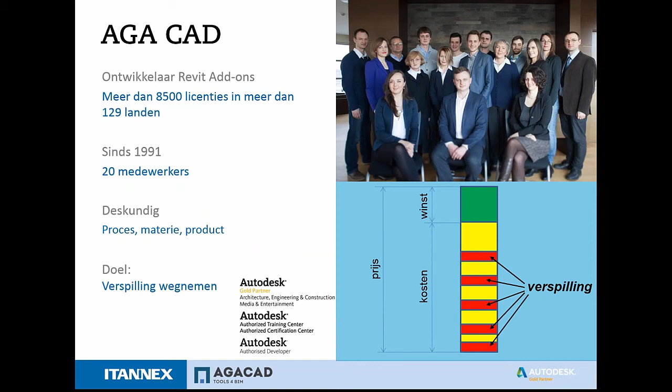It is nice to see you here. I want to say something about our company, as we are AGACAD and we are creating the solutions for Autodesk Revit. So here is the bucket of our solutions that can fit all of your needs.

So we have the solutions for MEP engineers for fire protection design, ventilation design, heating design, hangers. As well, we have the cut opening that we will show to you today, that goes for making openings around MEP line based elements. As well, we have the tools for Revit add-ons, just a little add-ons that can increase your work productivity for creating legends, exporting Excel to Revit, making cut openings, the free version, and so on.

We will speak about that a little bit later. As well, we have the smart assemblies, metal framing and wood framing for structural engineers for rafter, trusses, walls, floors, and so on. As well, we have the smart browser that goes for browsing of the libraries and managing them. So it's a very powerful tool for BIM managers, library managers, and so on.

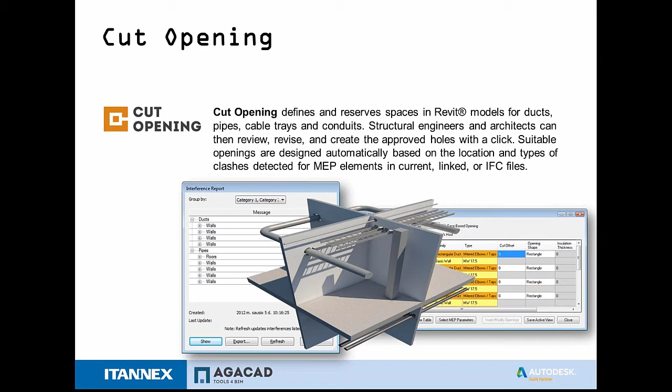Today I will also speak about the cut opening free, which is kind of the same thing but has less functionality. The cut opening free easily cuts holes in places where MEP ducts, pipes, cable trays, and conduits intersect walls, floors, ceilings, or roofs. This add-on manages the creation of openings using Revit interference check results.

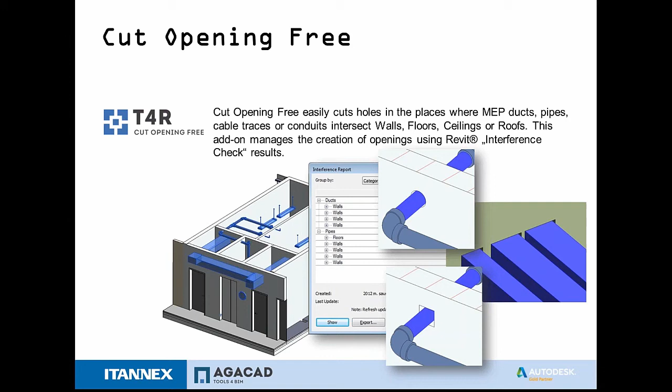So I just want to go quickly to my Revit, and here I have a little sample project. Here you can find the ducts, here you can find pipes, here you can find cable trays and conduits.

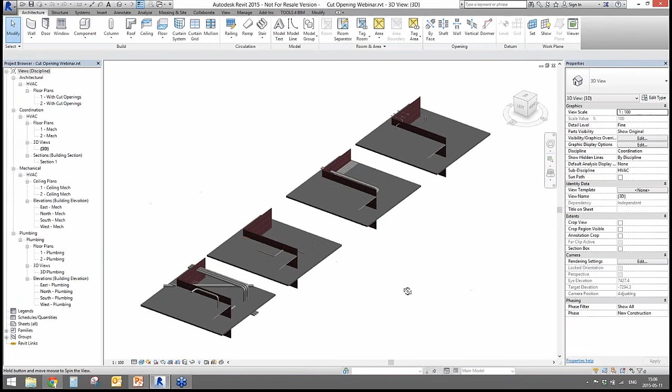Our solution is working in TOOLS 4 BIM dock, and you can find the cut opening over here, as well as the cut opening free over here. So you can drag and drop your own tools and use them quickly from here.

In the very beginning, the tool is using interference check information from Revit, and it is importing that information into the cut opening solution. So at the very beginning, I will run the interference check between different elements, between MEP elements and structural elements.

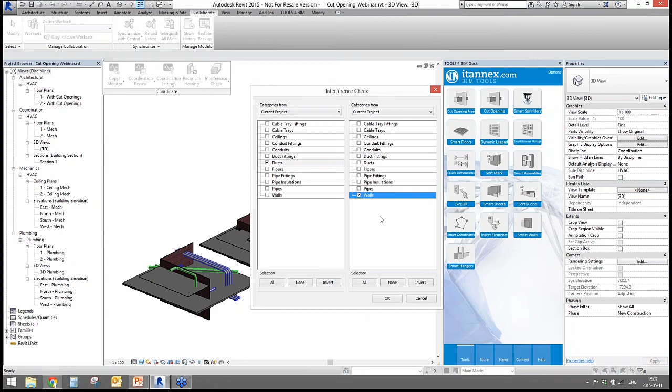For example, I will use the cut opening free at the beginning with ducts and walls, and I will run the interference check. So Revit finds all the clashes in our model just between ducts and walls.

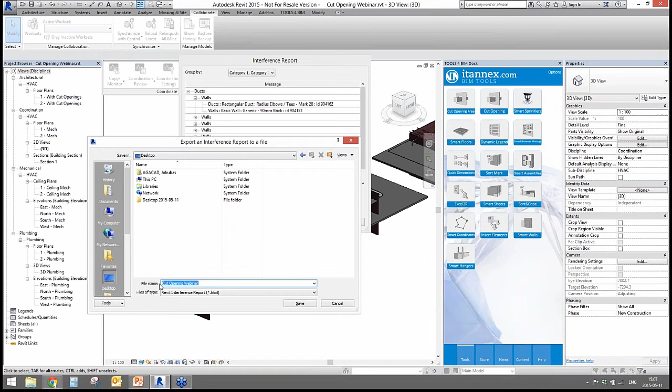What I can do is export all the information to external sources using the export functionality from Revit, for walls and ducts, cut opening free. So I'm just saving the file as an HTML file for further work with cut opening.

While clicking on my cut opening, here you will find all the possible features of cut opening. The cut opening free could read the interference check data and insert MEP openings straight into the same positions where the clash occurs, like where we find the wall and duct clash.

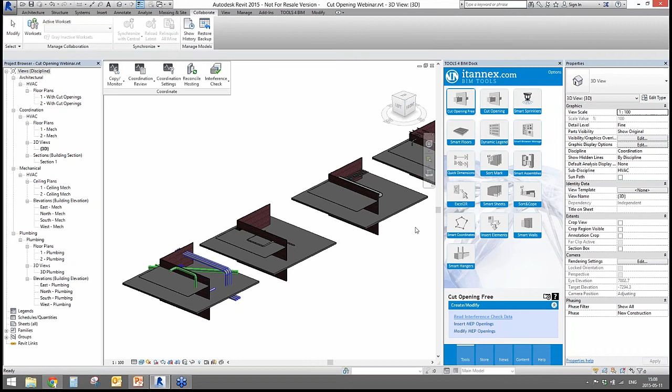At the very beginning, I will read the interference check data from the file that I saved on my desktop, the wall and duct cut opening free file, and it automatically finds all the clashes that we saved into the model.

As you can see, what do we have here? We have a really simple dialog box where we can do some configurations on the left side of the dialog box, for example if I need to sort my elements by levels and by types.

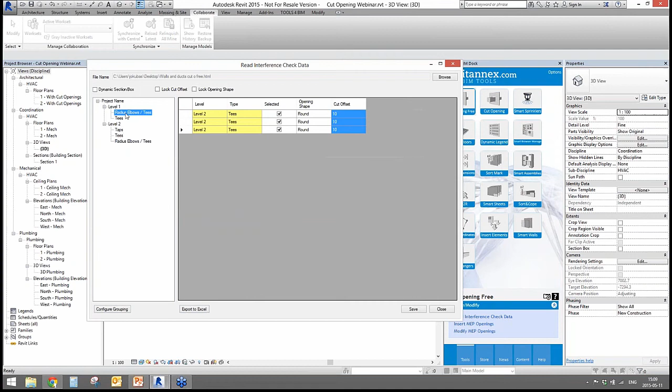I can also change the opening shape. For example, if I have the MEP line-based opening element round but I want it rectangular, it doesn't matter, it can handle that.

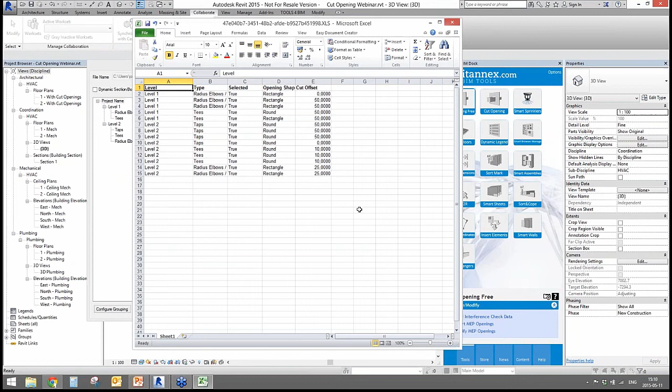So I can do these configurations for my holes, and after all this is done, I can export that to an external source like an Excel spreadsheet. You will see all the information about your openings in Excel. That's one of the possibilities of cut opening.

After all the configurations are done, we will save this file as an external XML file, just to read that information afterwards: the cut opening free XML file.

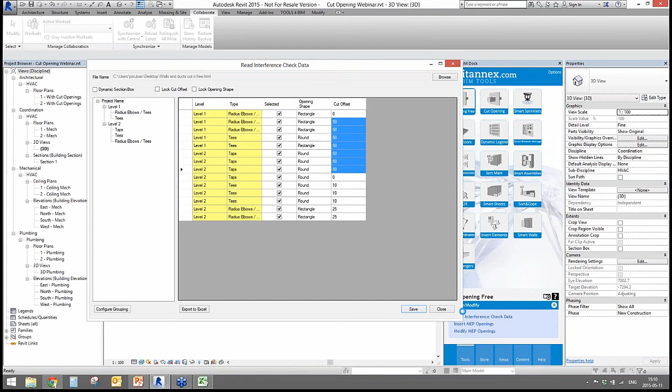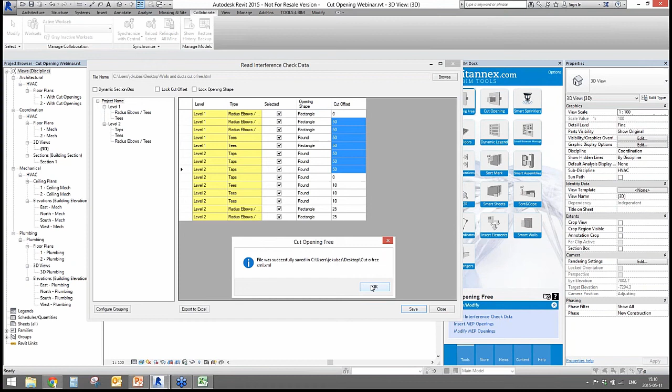So I'm saving that, and I will go to insert MEP openings. Now all the information about the offsets and the opening shapes is saved in our file. Anytime you can just send your XML file to your colleague, and your colleague can do the rest of the work.

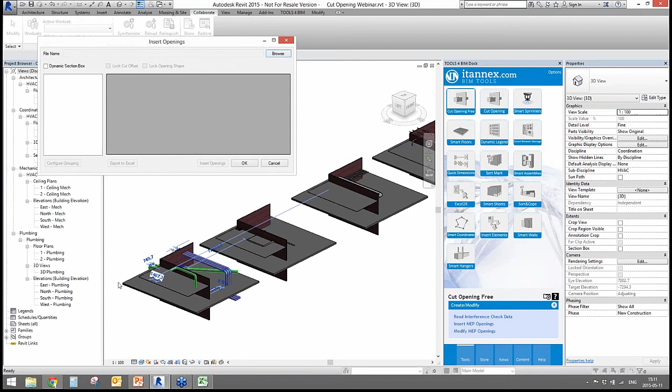It doesn't matter if you are an MEP engineer, architect, or structural engineer, you can do your work and send it to your colleague. So I'm browsing the cut opening free XML file, and as you can see, everything we discussed is still here: the cut offset, the opening shape. Anytime you need, you can take this XML file and send it to your colleague.

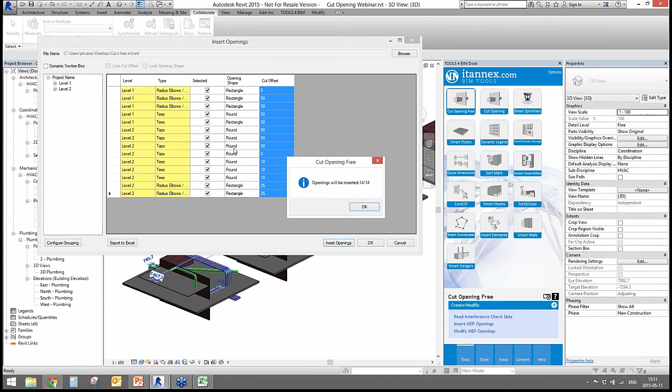This is a very nice possibility. After you see that all the things are correct, you insert the openings straight into the model. The cut opening free tool goes all around the building, looking for all the clashes between the walls and the ducts, and inserting separate elements in each place. After clicking OK, we get back to our model and you will see that we have created openings.

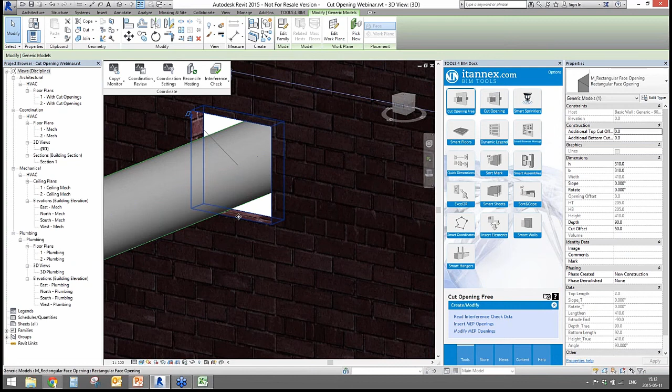Here we just created the rectangular opening where we have the round duct. Here we have the round ducts and the round openings.

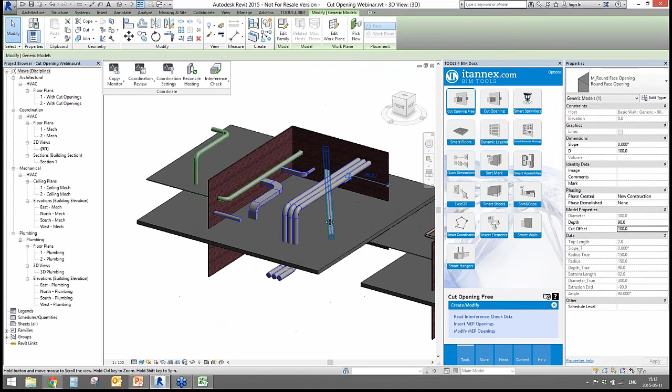Anytime you can do something manually, for example changing the cut offset of an element and so on. But cut opening free still has the possibility to modify MEP openings. If I click here, you will see all the element cut offsets and the opening shapes. If needed, I can change the value to 100 and say OK, and it will automatically recreate all the openings with the new parameters.

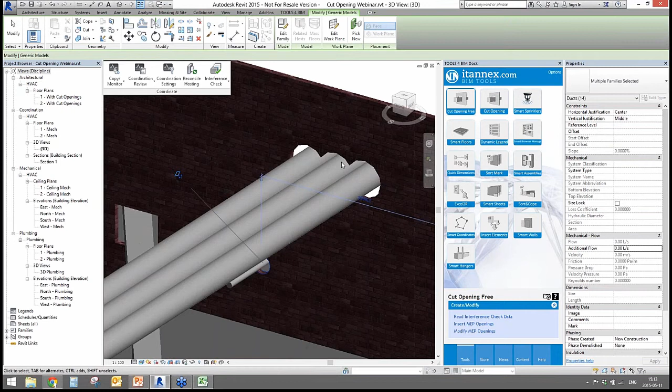So those are the possibilities of cut opening free and what it can do. Now I want to switch to another one that is more powerful and has more possibilities - this is cut opening, the professional version.

As you can see, cut opening, not the free version, has more possibilities. One of them is the configuration. We can auto join elements that are near each other by clicking this button. We also have the auto join offset, meaning the distance between two elements needed to join two holes into one big hole.

As well, we have included intersection, which applies for example to diffusers mounted on the wall. If we have a diffuser and the pipe does not cross over the wall but just reaches it, the solution can cut such places or not.

As well, we have the minimum opening size, which applies to width, height, and diameter. For example, it is even easier to drill the holes on the building site rather than manage all the things in the BIM model, but still, if needed, you can minimize your opening size to handle all the holes in the building.

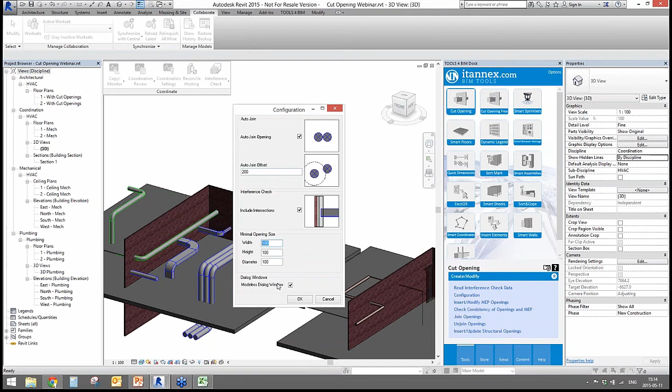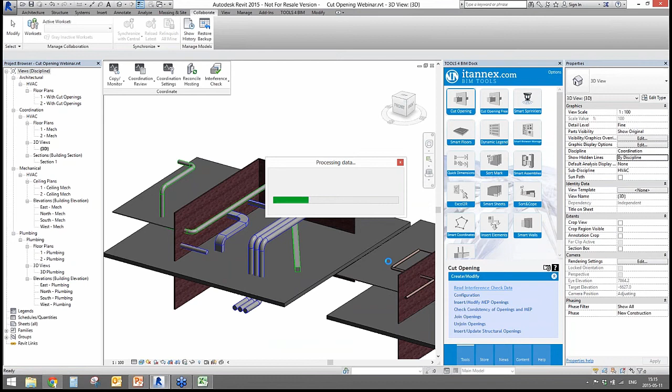After this, I will save that, and again I can run the interference check between ducts and walls. I will say OK, export ducts and walls, and read the interference check data again for the same file, for the same ducts, and ducts and walls just open.

You will see that we have the same possibilities as the free version of cut opening. So what can I do? I can show or not show the opening hosts, so I will see only the elements that are crossing the structural or architectural model.

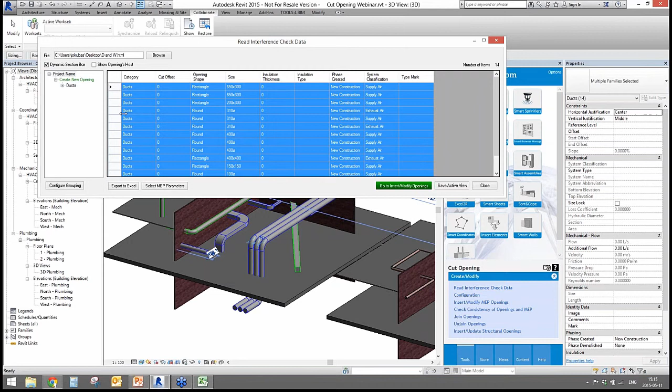As well, we have the dynamic section box that cuts the elements all around, showing the place where our MEP line-based element is crossing the structural element. This is a very useful thing for finding everything in the building - it's really nice.

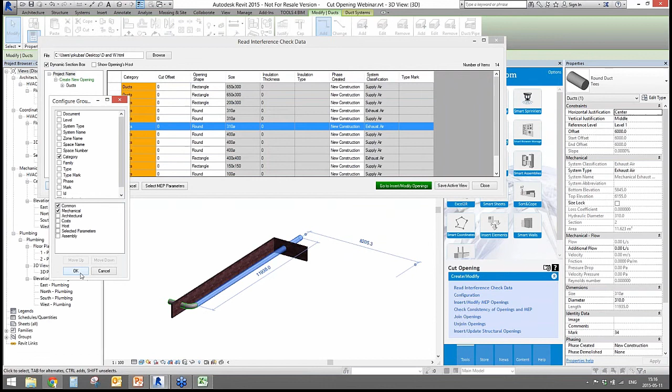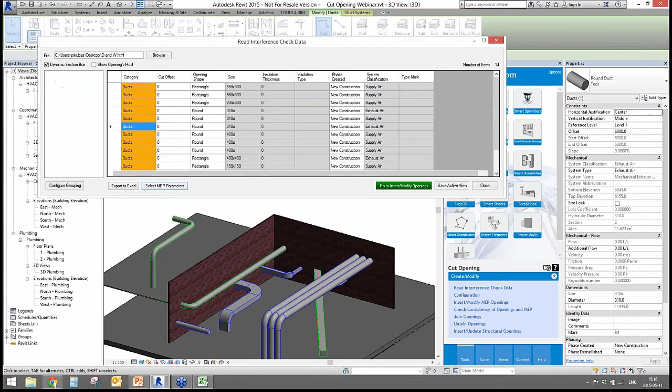As well, we have the configure grouping, the same as before, as well as exportation to Excel, and one more thing - the MEP parameters. Anytime you can take the available parameters for the family and transfer them to the project, just to sort something, or for example I need the sizes.

I can select distinct values in columns, just these ones - you will see only these. I will change the cut offset for only such elements. I will turn off all filters, and you can see I have all the elements here. As well, I can change the element shapes as before, as I showed you earlier.

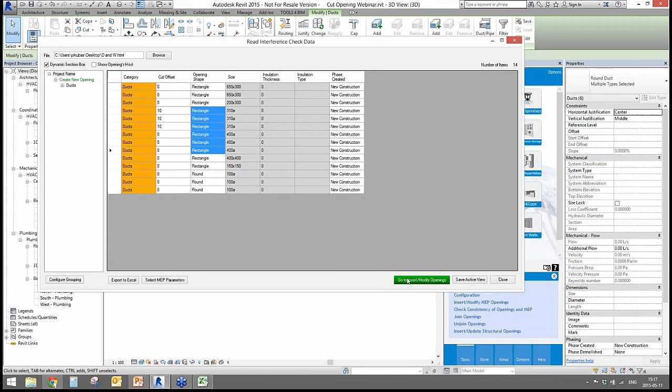After all the configurations are set, I can save the active view as an HTML file, as I showed you before with the free version. But at the moment, I can use insertion of the openings - so with just a click, I will insert all the openings in the building.

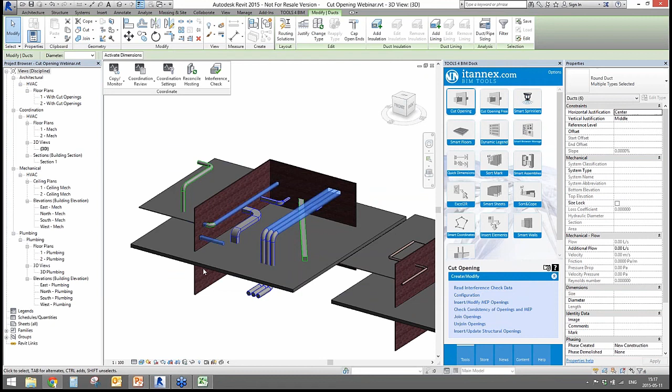I will join them and include the intersections, and I wouldn't cut something smaller than elements smaller than 100 millimeters. After all these are done, we can check the project.

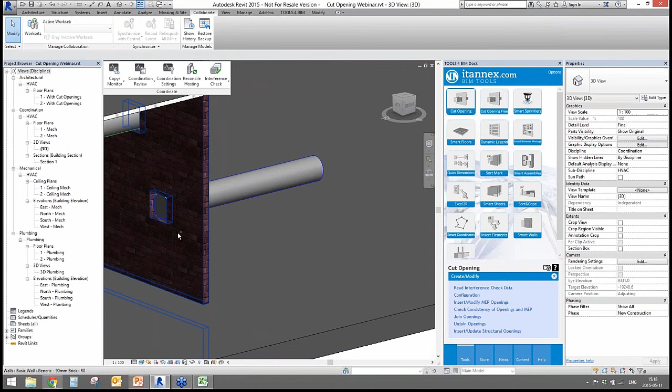As you can see, we have 3 ducts that are near each other, and we have only one hole here. We have also changed the shape of the element. Here we have the intersection where the duct is not crossing the whole wall, so it just reaches the wall, and the cut opening is creating the opening.

As well, the cut opening has the possibility—I will click on the openings—it has the possibility to join the openings. As you can see, it can be automatically joined, or if it's needed, I can unjoin the opening.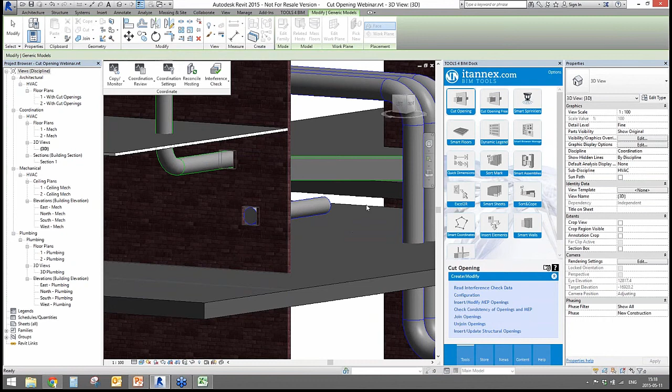I can go to this place and try to unjoin these elements. So again, I have 3 different holes over here. Anytime you can manage this with your ducts, pipes, cable trays, and so on.

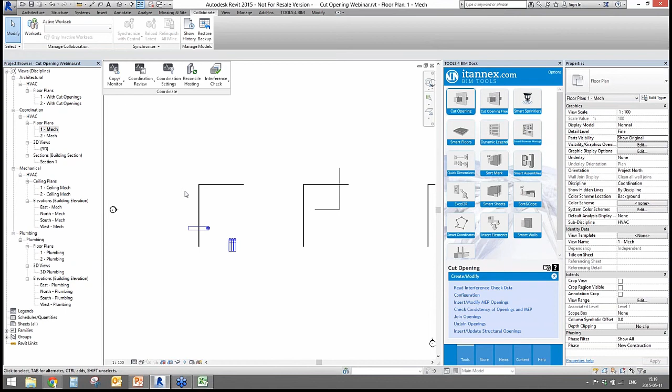If I go to the plan views, for example to the first floor plan, you can see I have the graphical representation of each of the holes in the building. This is just a generic model family that has the graphical representation.

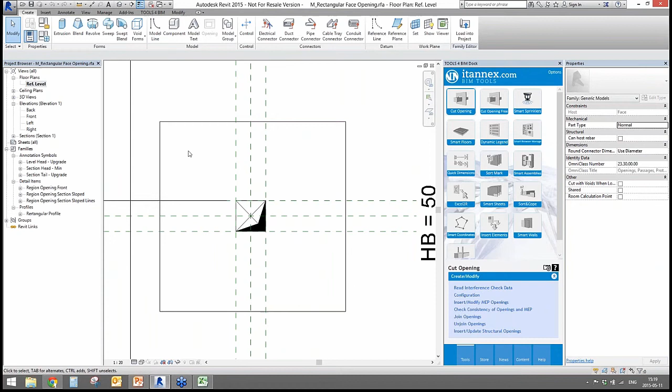If it's needed, you can just go inside the element of the family and create your own representation of the family. Just be careful about all the formulas and so on.

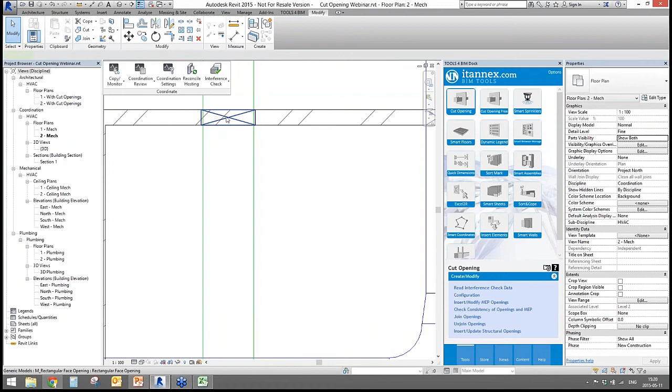Anytime you can turn off or turn on these graphical representations—like we have them black—and if needed, I can just turn off the filled region, and you will see they will be all just white instead of the black stripes. So anytime you need the graphical representation, do not forget to turn on the filled region.

As well, I get a bucket of questions: can we tag such elements? Because clients usually take the element, go through all the parameters, and do not see the elevation of the element. So we have inserted the possibility to calculate openings elevation.

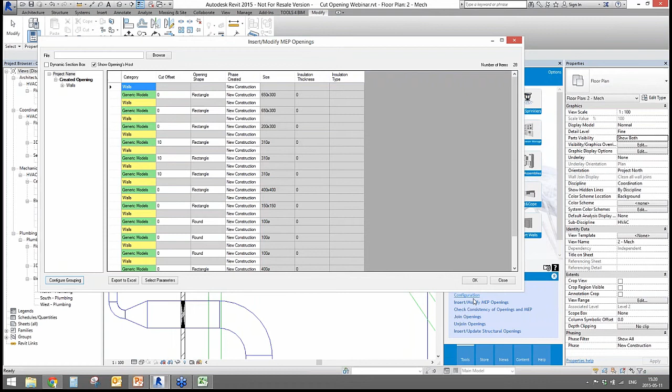For example, if I take all the elements and ask the solution to calculate top, bottom, shared, project, or level elevations, as well as coordinates on the X and Y axes—but I will just show the elevation. After clicking here, the solution suggests creating a new shared parameter that could be used in tagging, scheduling, and so on.

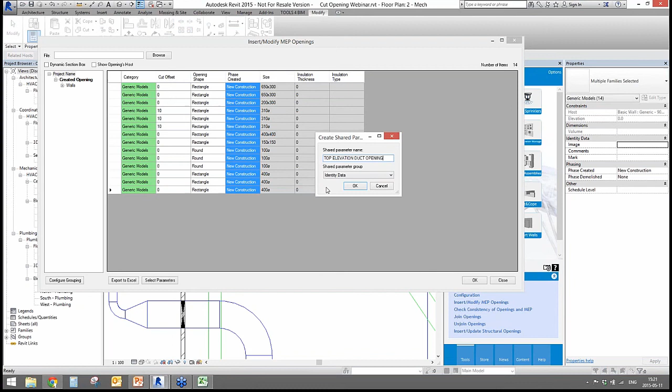So I'm clicking here: top elevation duct opening. I'm saying OK, and the solution automatically creates a new shared parameter, and it inserts the values—it calculates the values for each of these elements.

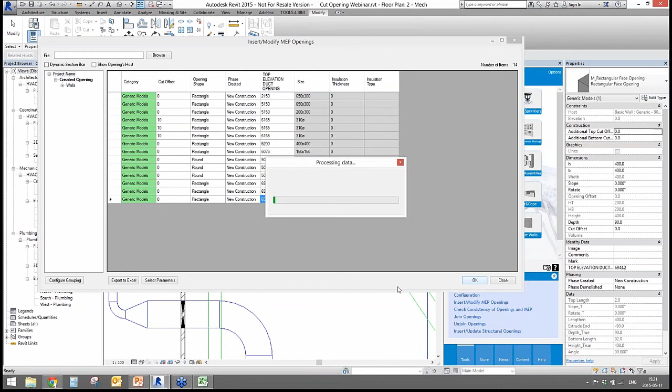After I click OK, I will try to tag these elements, but I do not have the loaded tag, so I'm going back to the generic model, open... and I think I caught it here—yeah, still nothing here.

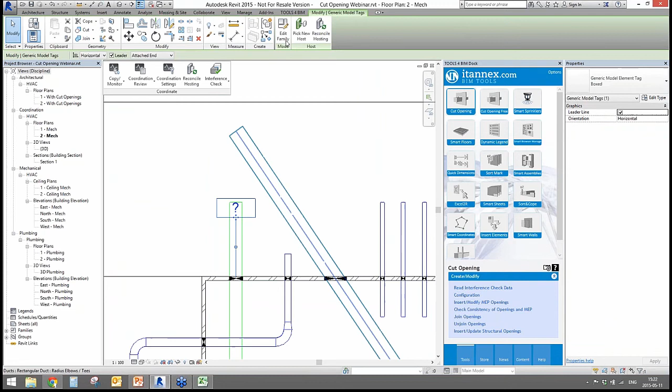So I'm going to edit my tag family, and I'm going into the label. I'm removing the element and adding the parameter—the parameter from the shared parameter file from the cut opening things, the top elevation duct opening. I'm clicking OK, saying OK.

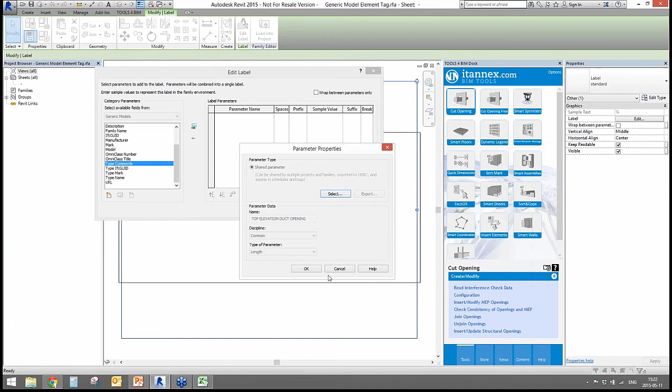I'm dragging it here, apply, OK, load into the project, override. Voila—we have the elevation, top elevation of each element.

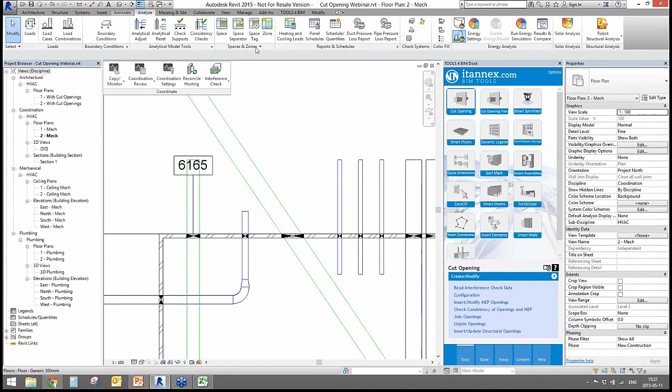So we can calculate the top elevation, bottom elevation, and combine that in the tagging and so on. After that, we can use the tag-all functionality with leader and so on. So that's what we have—this is really nice, that you can calculate the elevation, the coordinates, and use that in the building site and so on.

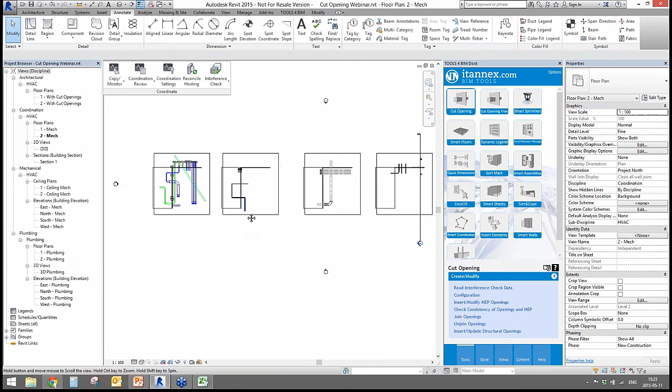We just did everything with ducts, but you might ask how it works with different elements. It works really easily.

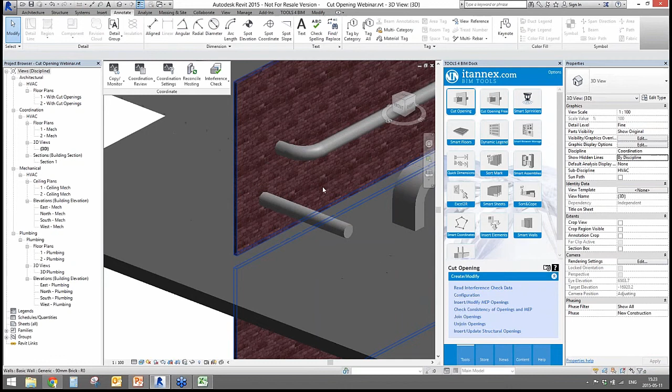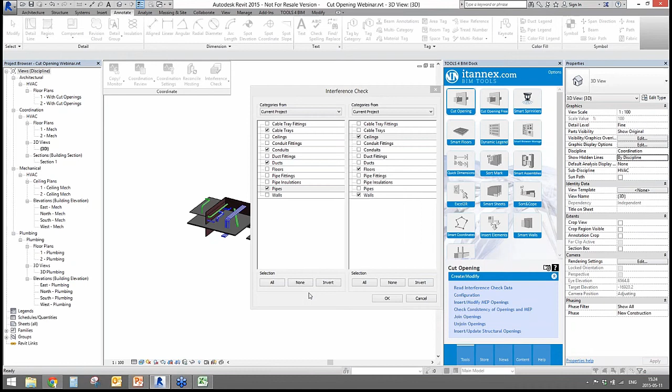If I turn off everything and try to delete all the generic models that have families of the openings—so I just deleted everything—I'm again going to run the interference check data between cable trays, conduits, ducts, and pipes, in between walls, floors, ceilings. As well, I want to mention this solution works as well with structural frames, structural beams, columns, and so on—it finds all the clashes between different elements and can insert the opening inside of this element.

After this, I will click OK, cut opening webinar, and I'm going to read the interference check data. I am browsing the element, the file.

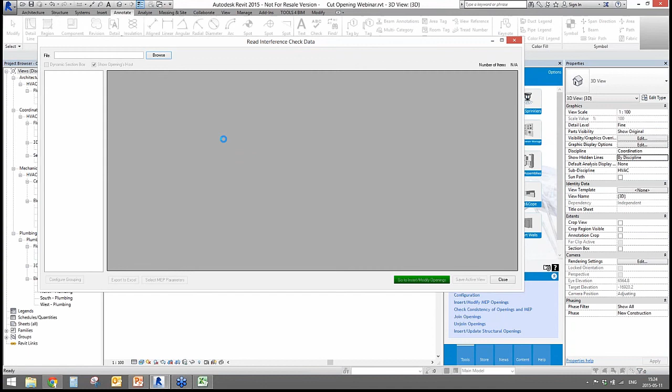And now, as you can see, we have removed elements from the interference check data, and we can see the removed elements report. It is showing all the elements that were removed. If you remember, okay, I will close it.

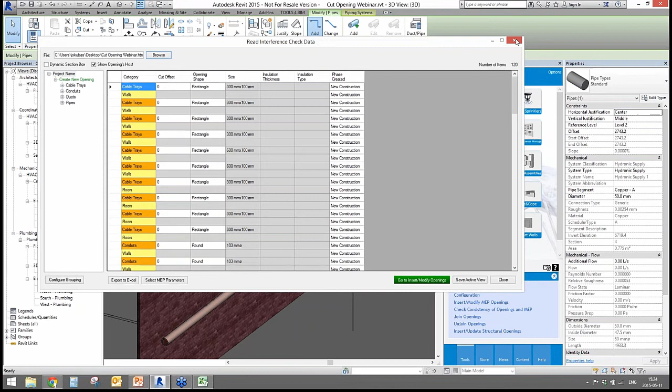They are too small because of the configurations. We have the configuration of minimum opening size, so we have 100, 100, and 100. If I click on such a pipe, you will see that the diameter is 50.

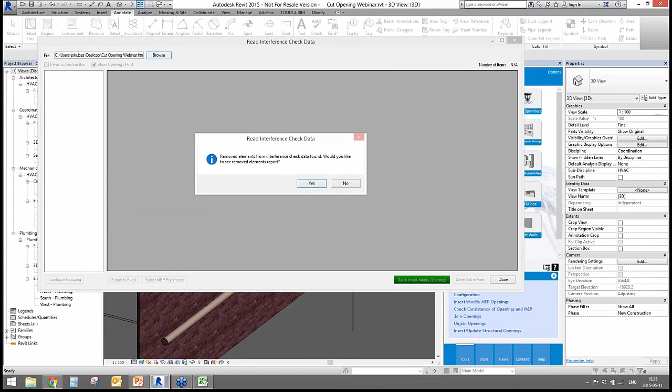And again, if I try to run the interference check data for that file, it is automatically removing elements from the interference check data. As you can see, it is showing which elements it is removing.

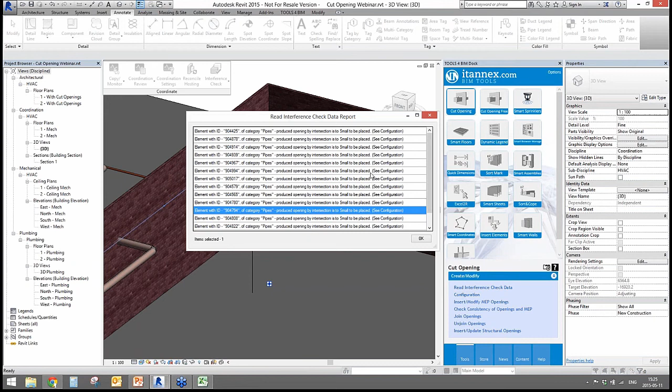It is writing the purpose why it is removing that opening: the intersection is too small to be placed. After I click OK, I will never see these again, so I will see only my needed elements. For example, the cable trays, conduits, ducts, and pipes.

If it's needed, I can group openings by hosts. Again, it is going by ceilings, floors, and walls. So you can find your needed way to work and your needed way to save time.

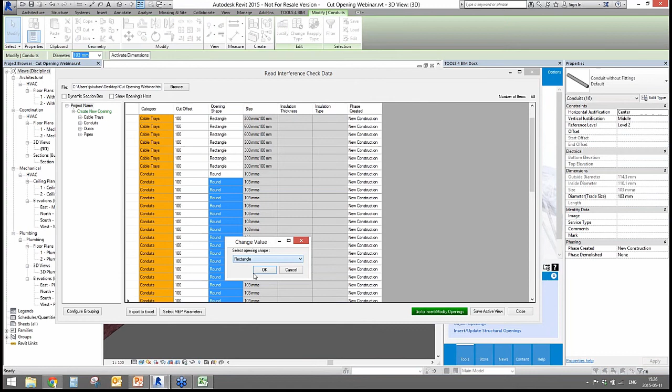So again, I'm just inserting some new parameters here. I'm changing the element shape and so on. After this is done, I'm going to insert and modify elements.

It is detecting all the elements all around the building, and at the moment it is going through, and in all the clashes it is inserting the elements.

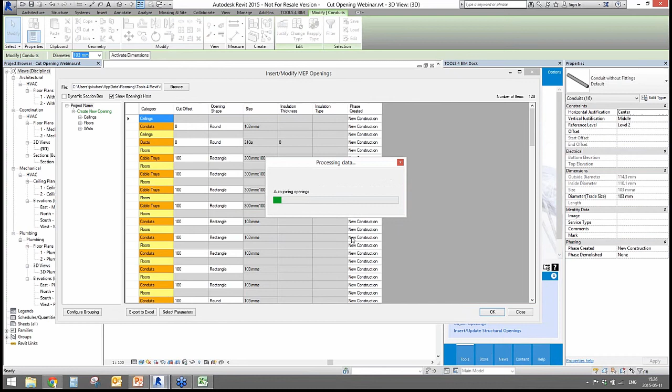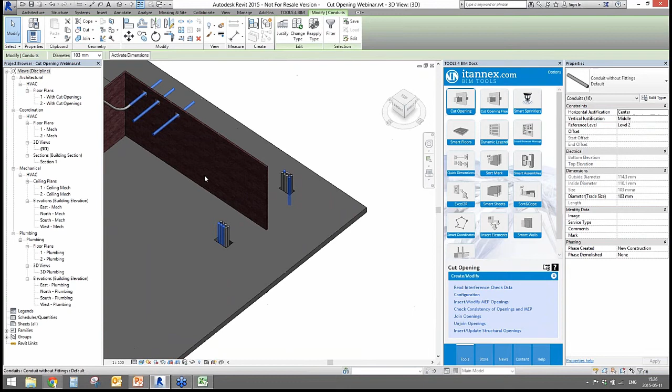As you can see, we have 60 elements, and we have 34 openings just because of the auto join functionality. As you can see, we have the cable trays here, the conduits here, the cable trays, and the things in the ceilings and so on.

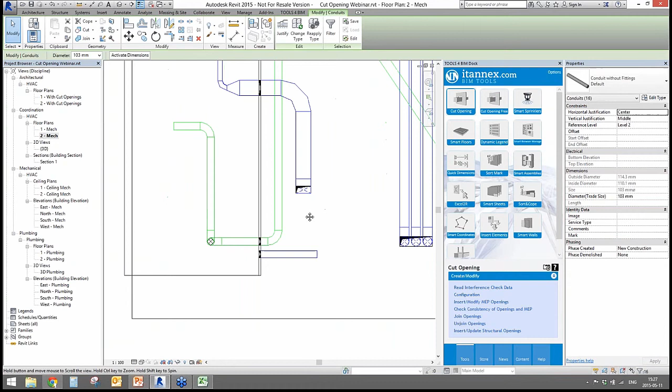As well, I want to say that we have the graphical representation for ceilings and floors, and ceilings and roofs. We have the same representation as well. As you can see, the solution is working with all the elements.

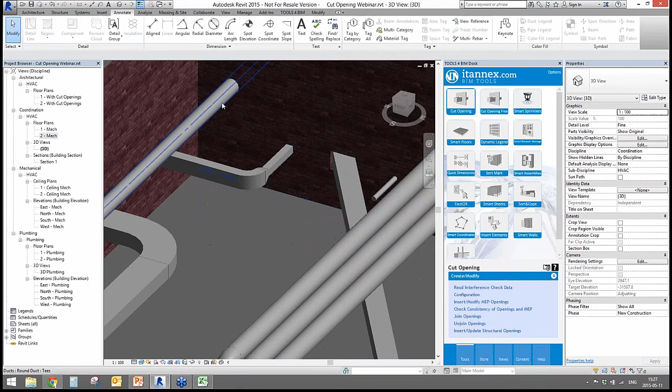So do not hesitate to try the solution and see how it is working. I get a bucket of questions about how the openings will move if I move my main element, like a duct. As you can see, the hole remains in the same position.

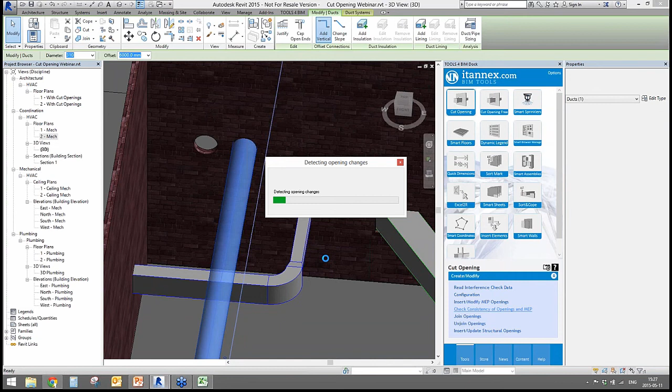But I can check the consistency of openings and MEP. It is again going and detecting all the opening changes, and as you can see, we have the wall and the generic model for the round opening is changed.

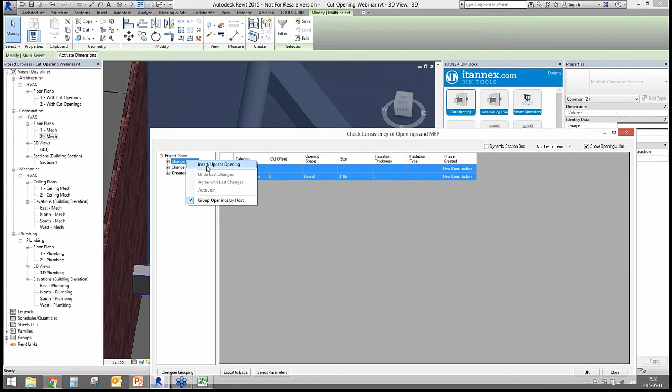So what I can do is insert/update opening for that element. As you can see, after clicking OK, the opening is here.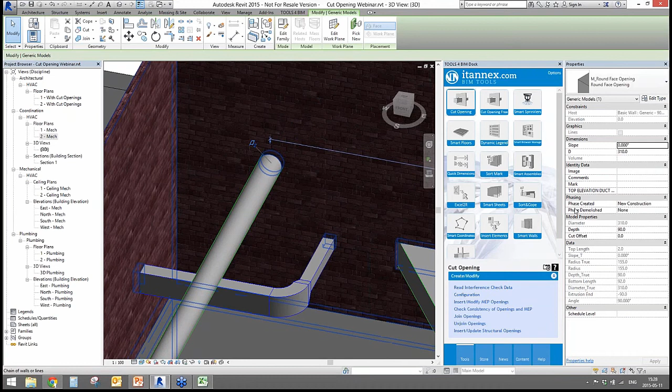I can just do a bigger offset just for graphical representation. So using the cut opening free version, you will just have to rerun the interference check again, reread the interference check data again, and reinsert MEP openings into the model.

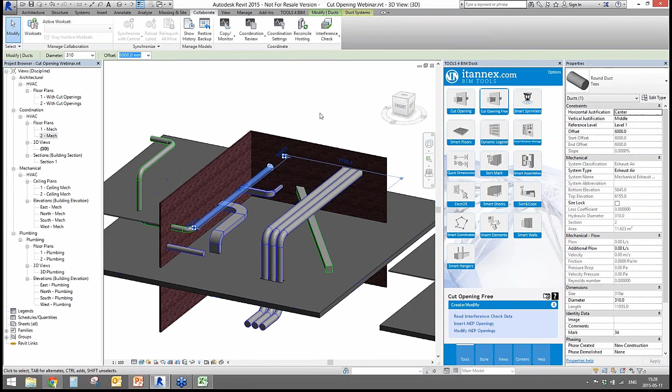As well, I wanted to show you how the cut opening is working with linked files. So if I have the architectural model linked into the MEP model, or otherwise the MEP model linked into a regular architectural model, I can use the cut opening. The cut opening free version couldn't read the interference check data before.

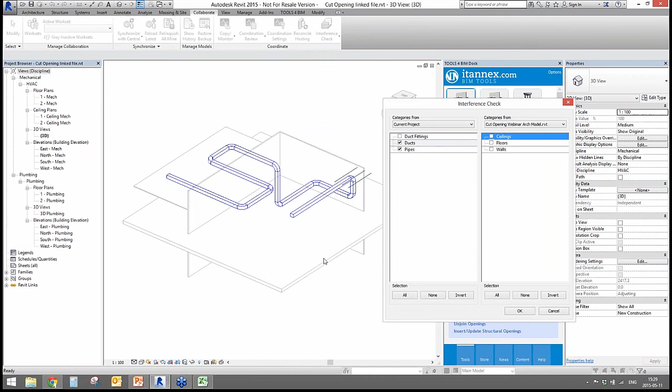So if I run here in the project the interference check between pipes and ducts, here you can see pipes and several ducts, and I will try to run it with the architectural model that is linked inside this project, checking all of these. Revit is finding all the clashes, so I can export that linked file, and I will try to use the cut opening free.

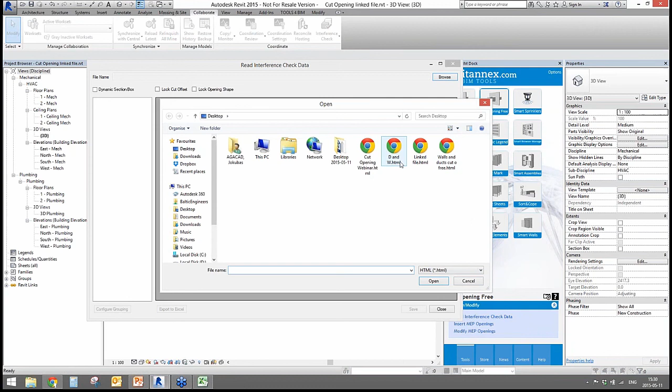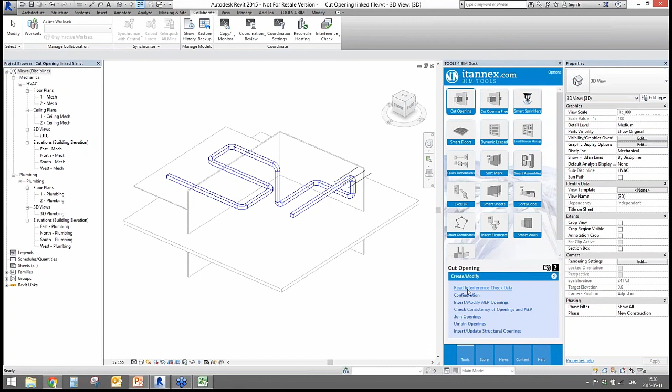So the Cut Opening Free will tell us that Cut Opening Free does not work with linked files. So as I said, Cut Opening Free is not working, but the solution is the main Cut Opening, the pro version.

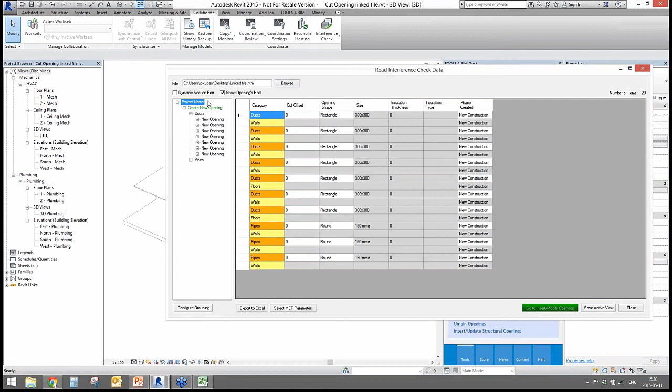So it can read the interference check data between linked files. I will open that, and I can go to Insert and Modify Openings. So what I'm going to do, for example, is the cut offset setting in here, and I'm going to save the active view.

Linked file.html, so I'm saving that, and the cut opening should insert the opening elements in the real Revit elements, not in the linked ones, but in the real walls, in the real floors, in the real ceilings, in the real elements, as I said before.

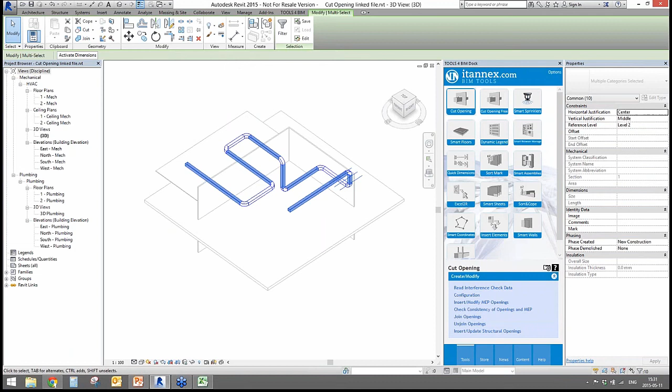So I am closing the linked file, and I'm going to the Cut Opening architectural model that does not include any of the line-based MEP elements. So I'm opening my document again, and what I can do is insert

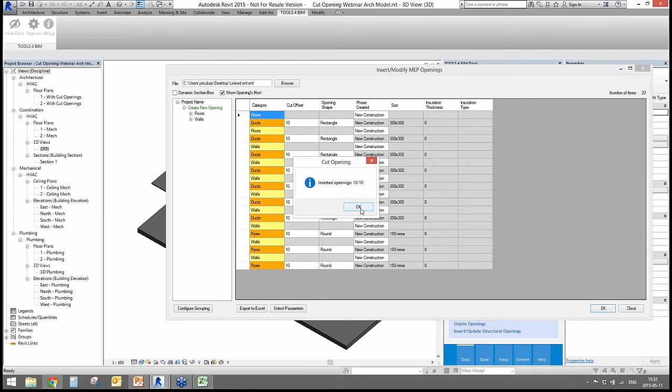MEP openings from the XML file using my Cut Opening. As you can see, all the information about the cut offsets and the opening shapes are still here, and after clicking OK, it is inserting all the openings into the building.

Again, if I delete this and try to use Cut Opening Free, Cut Opening Free could not read the interference check data. But if your colleague does that with a regular Cut Opening and sends the information in the XML file to you, you will be able to insert those openings into the model. So let's try.

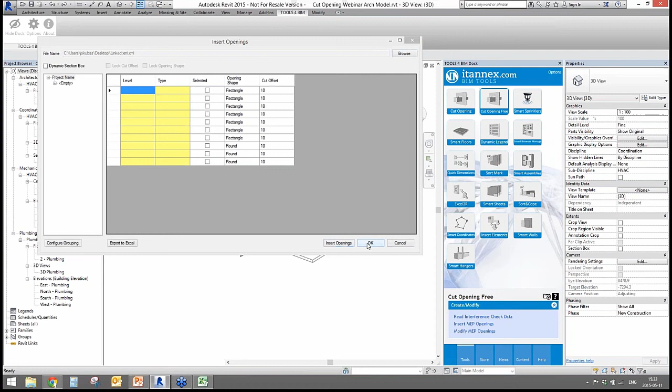So I'm using Cut Opening Free, Insert MEP Openings from Linked File, and I have again the same cut offsets and the same opening shapes. So I'm inserting the openings, saying OK, OK here, and as you can see, Cut Opening Free is still a powerful one, but it is free.

So I suggest you try both of them because they are free of charge for 30 days for the trial version of Cut Opening. As well, we have Cut Opening Free that is free and you can try.

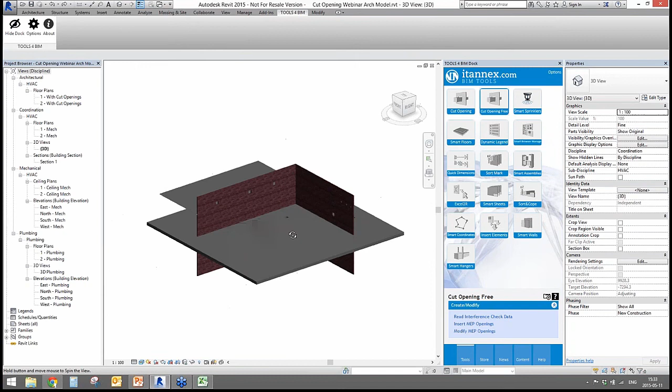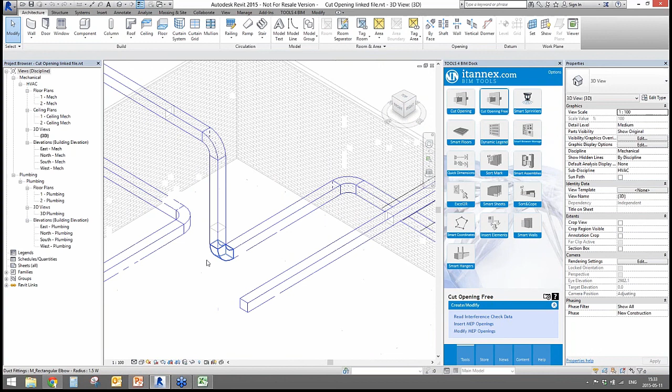So if I save this project, okay, and I'm going back to my Cut Opening linked file, you will see that I have the openings over here in my linked Revit model. So it is really a nice thing, it is brilliant, perfectly, and I suggest you try this solution.